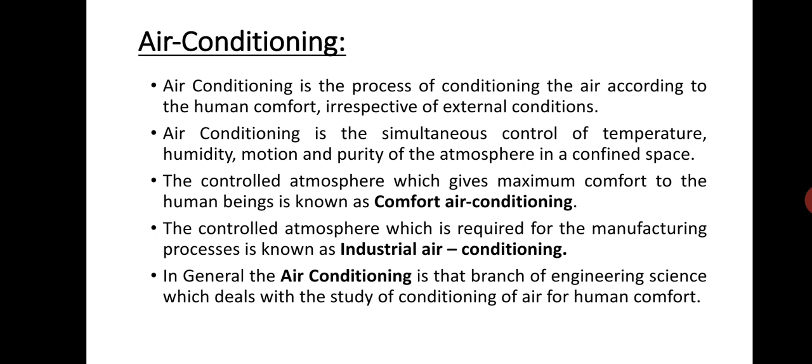Next, classification of air conditioning systems. So air conditioning systems are classified according to the purpose: comfort air conditioning and industrial air conditioning. So next, according to the season of the year: summer air conditioning, winter air conditioning, year round air conditioning.

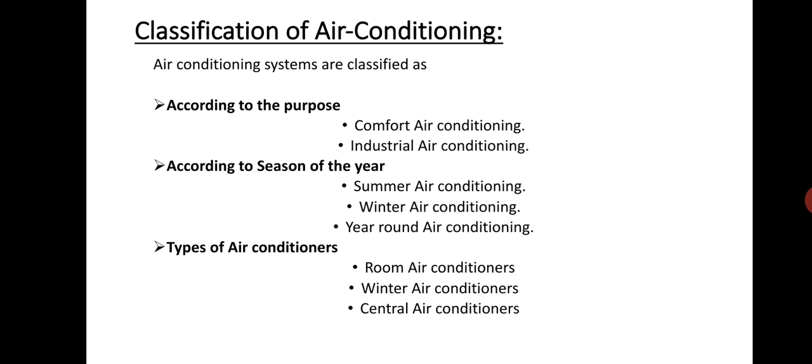So next, types of air conditioners: room air conditioners, winter air conditioners, central air conditioner. So these are the classifications of air conditioning systems. So next, functions of air conditioners. The main function of an air conditioner is cleaning the air. Next, controlling the temperature of the air and controlling the moisture content. Next, circulating the air.

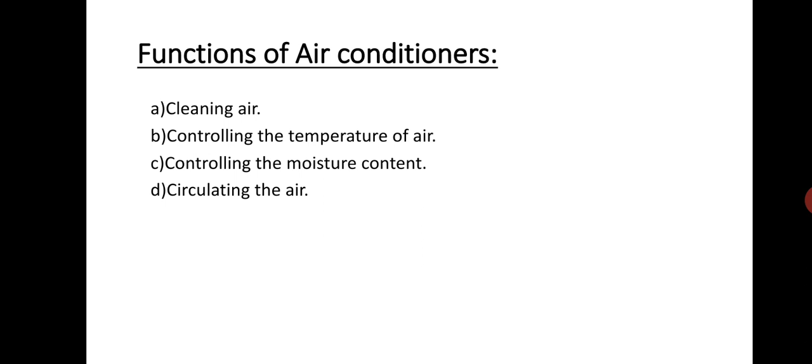So next we discuss the topic basic terminologies of air conditioning. These are the points to be noted. First one is dry air, psychrometry, temperature, moisture, humidity, relative humidity, dry bulb temperature denoted as DBT, wet bulb temperature denoted as WBT, dew point temperature denoted as DPT.

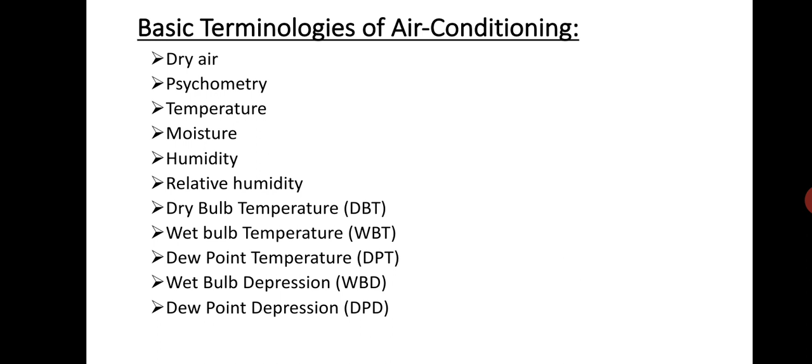So wet bulb depression, denoted as WBD. Next, dew point depression, DPD. So these are the basic terminologies of air conditioning systems. So let's see one by one. First, dry air. Dry air is the atmospheric air which has no water vapor. There is no water vapor in the atmospheric air or ambient air, it's called dry air.

Second one is psychrometry. Psychrometry is the study of properties of atmospheric air. Next, temperature. Temperature means the degree of hotness or coldness. Moisture. Moisture is the water vapor present in the air. How much water vapor is present in the air is known as moisture.

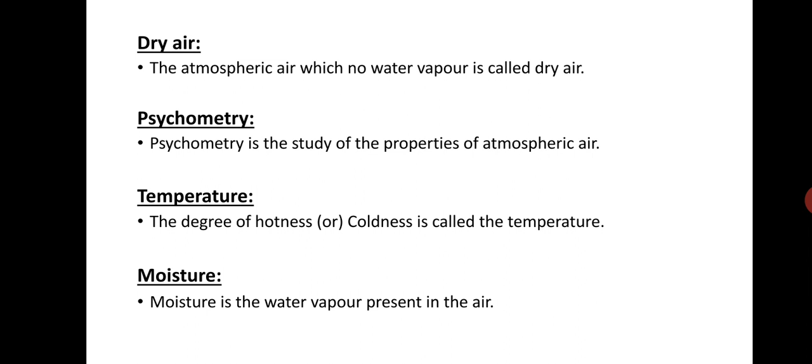Next, humidity. Humidity is the mass of water vapor present in 1 kg of dry air and is generally expressed in terms of gm per kg of dry air. It's also called specific humidity or humidity ratio. So humidity, or specific humidity, or humidity ratio.

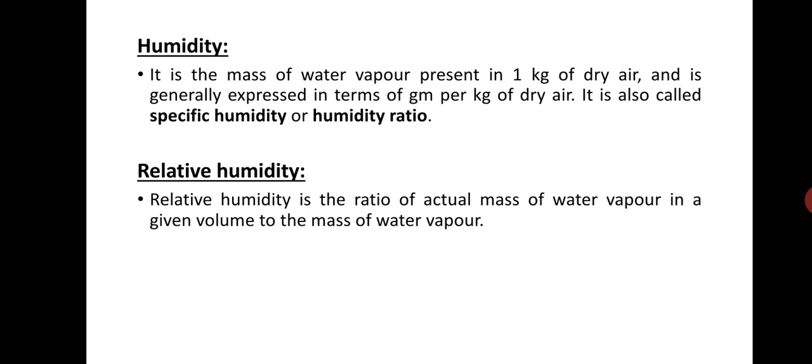Next, relative humidity. Relative humidity is the ratio of the actual mass of water vapor in a given volume to the mass of the water vapor at saturation. So this is relative humidity. Next we will discuss dry bulb temperature. The temperature of the air measured by an ordinary thermometer is called dry bulb temperature, denoted as DBT.

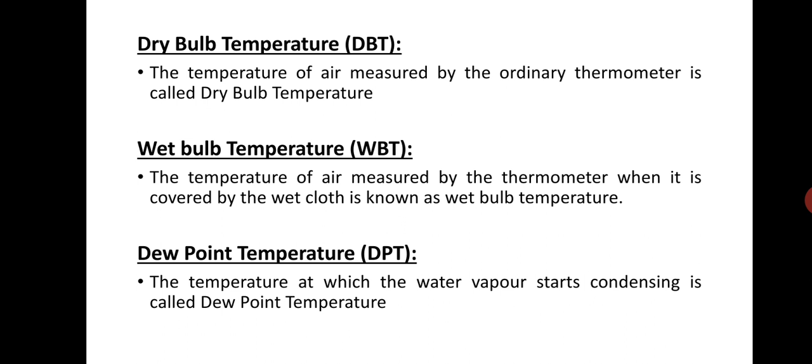Wet bulb temperature, WBT, is the temperature of air measured by the thermometer when it is covered by a wet cloth. Next, dew point temperature, denoted as DPT. The temperature at which the water vapor starts condensing is called dew point temperature.

Next, wet bulb depression, WBD. It is the difference between dry bulb temperature and wet bulb temperature at any point. If the air is fully saturated, there is no wet bulb depression. Mathematically, WBD = DBT − WBT, that means dry bulb temperature minus wet bulb temperature.

Next, dew point depression, denoted as DPD. It is the difference between dry bulb temperature and dew point temperature. DPD = DBT − DPT, I mean dry bulb temperature minus dew point temperature. So these are the terminologies used in air conditioning systems.

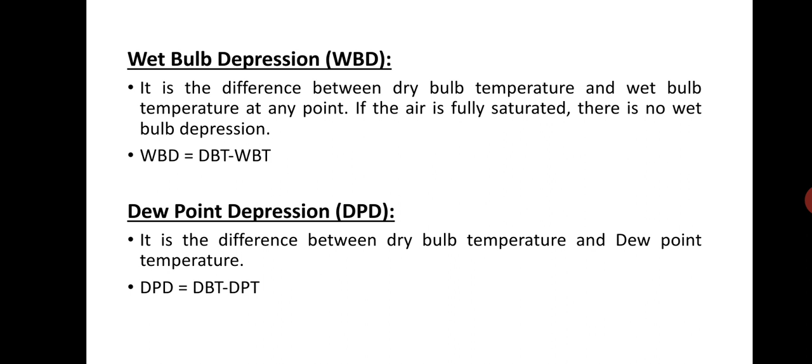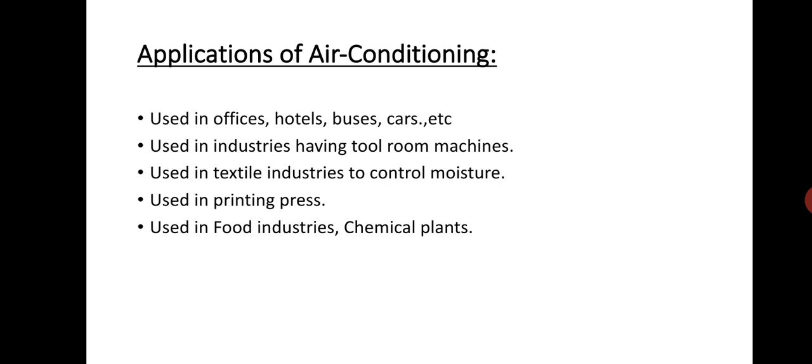So today lecture 2 is over. In lecture 2, the topics were terminologies of air conditioning systems, what is air conditioning, and the classification of air conditioning. At the same time, the terminologies used in air conditioning systems were also discussed. Then finally, the applications of air conditioning systems were discussed.